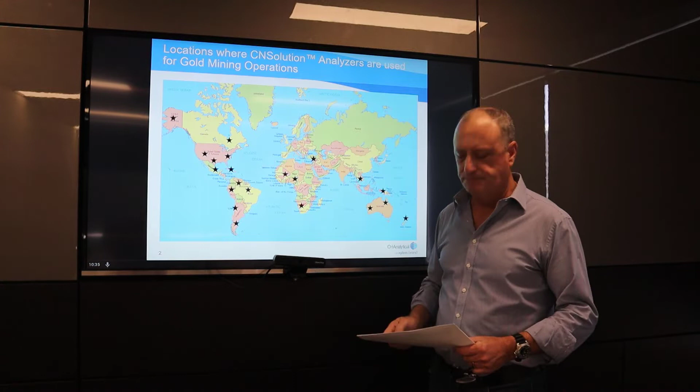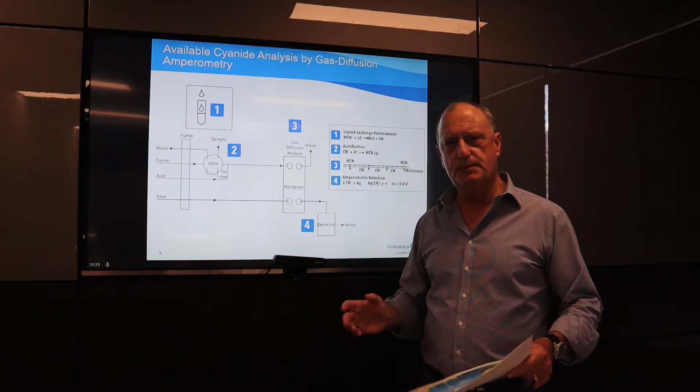Essentially, what we're doing is taking a filtered sample from either your bores or your detox plants or your discharge points, anywhere you need to monitor your cyanide at low level, which is typically for environmental applications. The technique for WAD in particular requires addition of what we call a ligand to get the cyanide into solution. We inject a known volume into an acid stream.

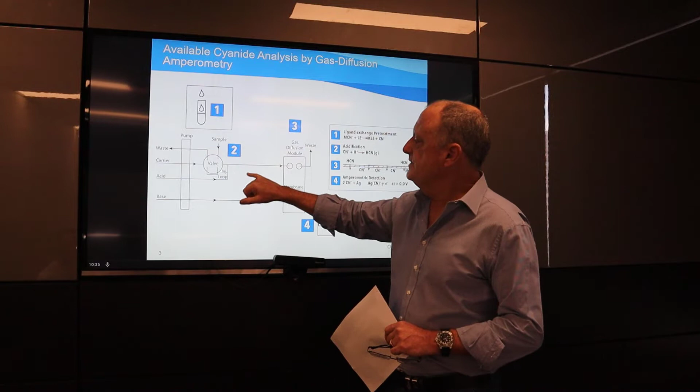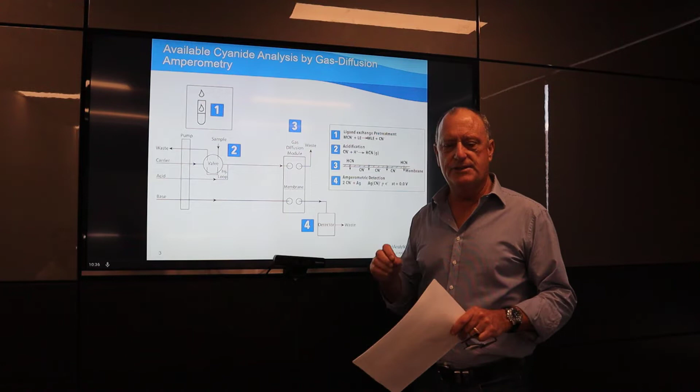Hydrogen cyanide gas is evolved and moves selectively across a membrane into a sodium hydroxide capturing solution. And it's measured by an amperometric detector, which is a silver-silver chloride reference electrode and a silver electrode. Silver and cyanide combine, releasing an electron, giving us a signal.

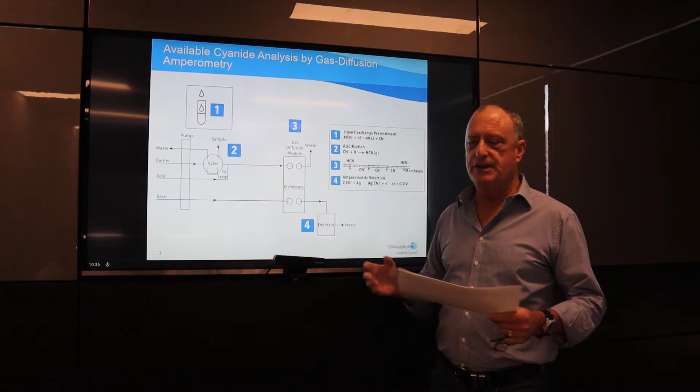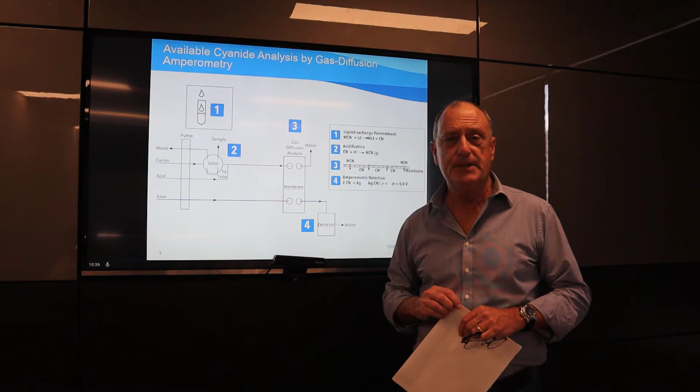So we essentially are eliminating, at the diffusion membrane, all known interferences up to about 50 ppm of things like thiocyanate. So its benefits over titration and distillation are very low levels of interferences and very low levels of detection. So we can actually use this instrument to detect up to 10 ppm and down to ppb levels. Next slide, please.

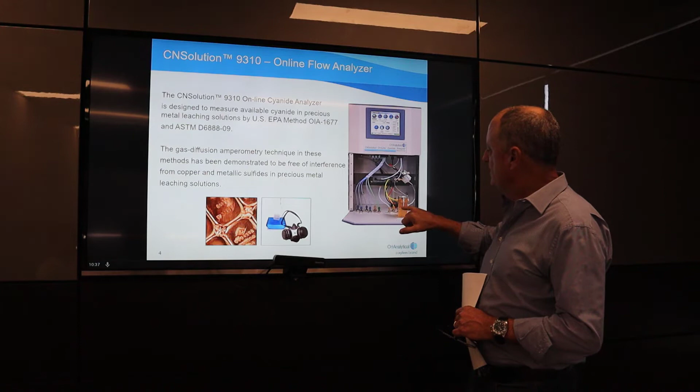There are two instruments in our offerings. One is an online analyzer, the 9310. It is using exactly the same technology. We use a sample loop to inject a known volume of sample, passes into an acid stream, across this membrane, hydrogen cyanide gas is evolved, taken into an amperometric detector cell. There's a reference electrode and measured on the instrument.

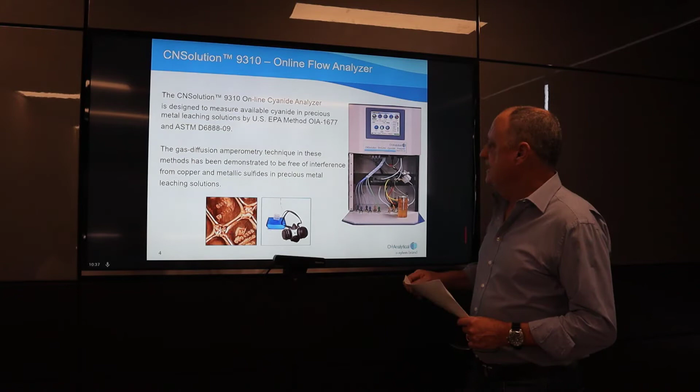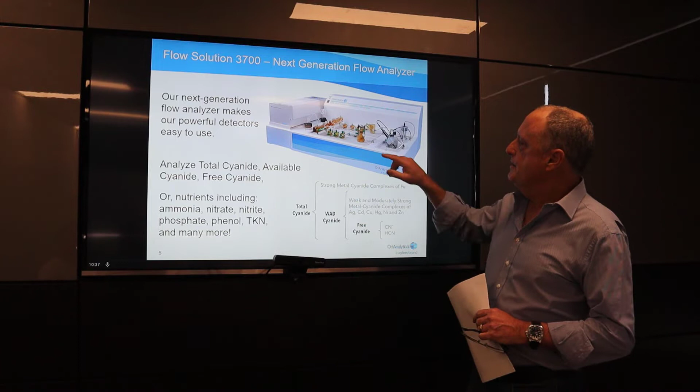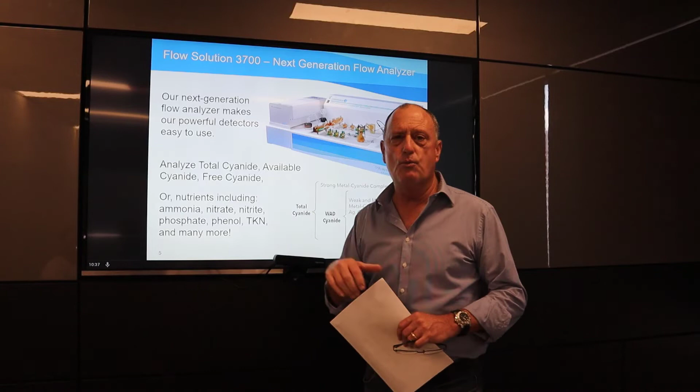We don't have many of these in Australia, but we do have the next instrument, which is the laboratory machine. This uses exactly the same detection capabilities. We have the ability to run two chemistries on one platform, and this one instrument can run all three chemistries that the laboratory might need to run, both free, total, and available cyanide, or WAD cyanide. It's also a platform for running other analytes, but we're interested in cyanide today.

So for free cyanide, we're measuring this species. We run that on the WAD channel, and the only change we make to the chemistry is the introduction of a buffer solution between 6 and 7 pH for the acidification solution, which we use for the WAD cyanides. Then we have another channel where we introduce UV digestion to enable us to break down the irons and cobalts, and we can then do a total cyanide analysis.

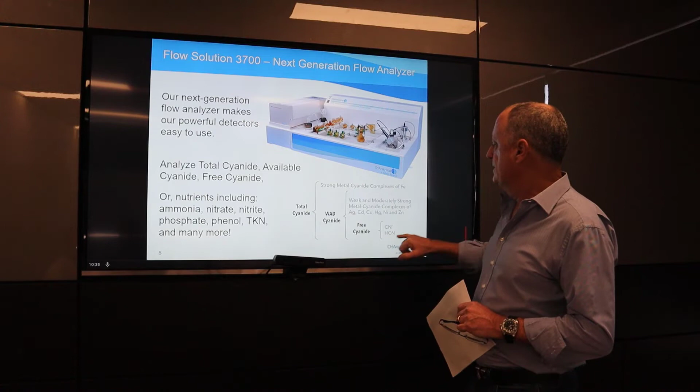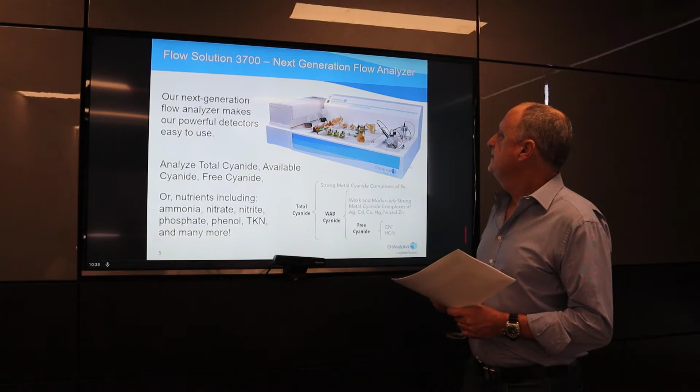Most of my customers in the gold mines are looking for WAD analysis, which is these species here. So the analyzer can be run as a single channel, as a sequential dual channel, or a simultaneous dual channel. If I could have the next slide, please. As I've mentioned before, the detection ranges for the 9310 online machine are 2 parts per billion up to 10,000 parts per billion.

We can run in the lab machine, I've calibrated out to about 80 parts per million, but the method states 5 parts per million. So we run a normal calibration for auditing purposes from 0 to 5 ppm, with higher standards than that diluted down to the detector's range.

Next one, please. The application for the online analyzers is similar to any online analyzers you might have in process control at the moment, where you want to control the level of cyanide in your plant. But our lab analyzer is what we're talking about more today.

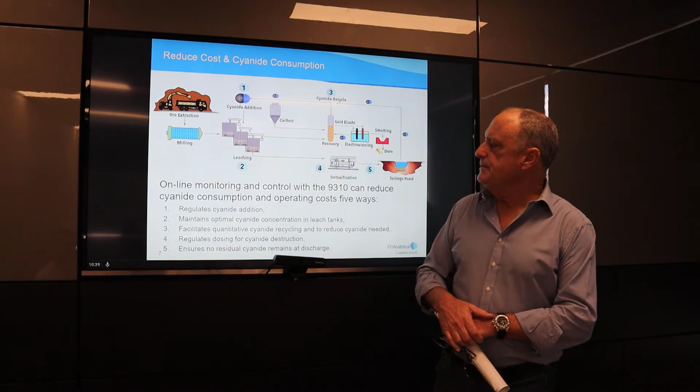Next slide, please. This is a system where samples are preserved in the field, brought into the laboratory, diluted to range, and then put into an auto sampler. A method is chosen, you push a button, walk away, and the analysis proceeds while you're doing something else. It's controlled by fairly nice new modern software where we designate an instrument, we create a sample table, we have a method, and we run samples.

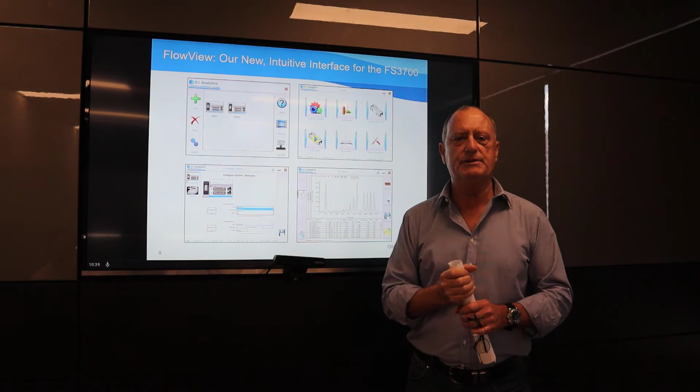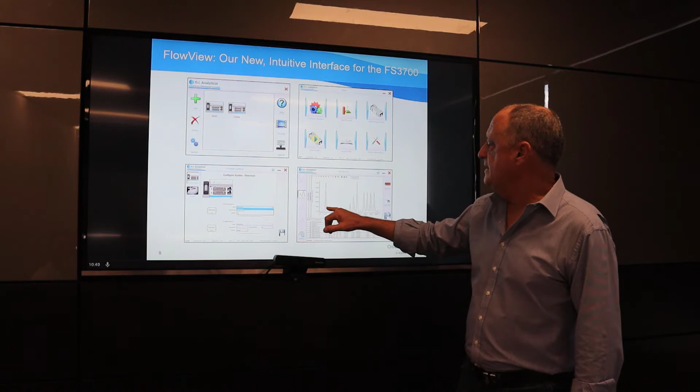Not dissimilar to, say, an atomic absorption spectrophotometer, where you're calibrating, producing a calibration curve, using known standards and a routine daily method. Results are prepared and presented like this with a sample table. Again, not dissimilar to an atomic absorption spectrophotometer. 2 channels represented here. We're looking at standard calibration, a series of unknowns, and then a report.

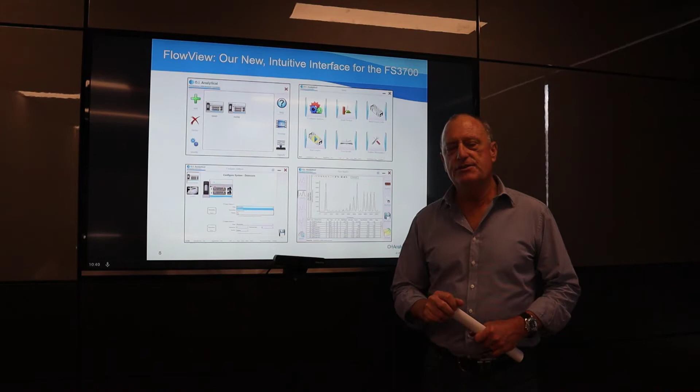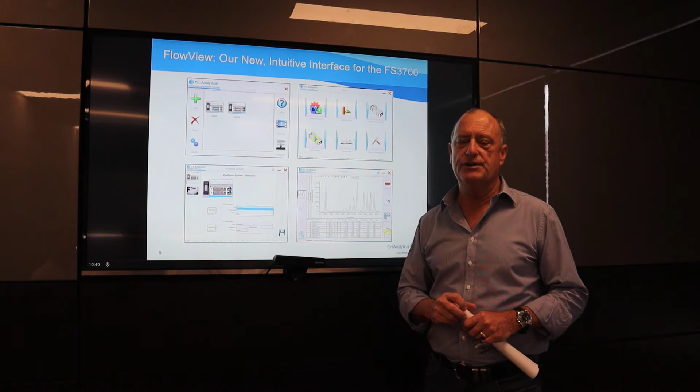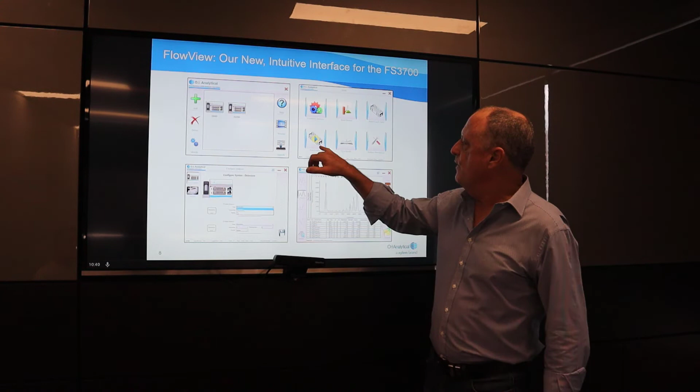As far as reports go, we can export that a number of ways. We have the ability to print it directly to a printer. We have an export function here to either go out to LIMS or out to an Excel spreadsheet file on your computer. If you're running LIMS, which is, I guess, the feature of this seminar today, the ability to import is in here, the build sample table. We import a sample table, save that name, and when we run samples, we call up that sample table exactly as you've presented it from your LIMS system.

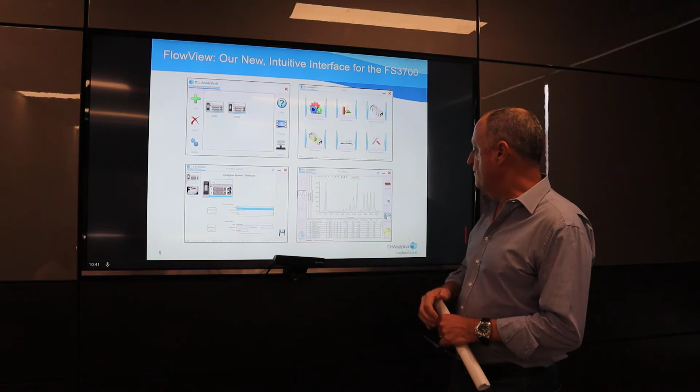Equally, when you finish the run, you export those results. You can save them in any format you like. So it is very LIMS friendly, and we have a number of instruments in Australia running LIMS on this machine. Next slide, please. Thank you very much. That's the FS 3700. Any questions?

Great, thanks for that presentation, Graham. We hear a lot about our customers using cyanide titrations in their laboratory. So can you tell me the advantages of flow injection analysis you've presented today over cyanide titration? Sure. Increasingly, gold mines are becoming subject to audits, particularly environmental audits. There's one side to the gold mine, which is the process side. That's where you make your money, so it's important to control your cyanide so that there's enough in the tanks to make sure you're not missing gold.

But on the other side of the coin, if you're using cyanide, you are required by law not to discharge that into the environment. So what you're probably doing now, if you're not using flow injection, is titration, or perhaps even still distillation. The problem with those techniques, while they're cheap, is that they are highly erroneous, and with titration, subject to interpretation by operators. So if you need to improve the precision and detectability for your cyanide, if you're under pressure environmentally, or you're spending a lot of money sending samples out to private laboratories in major cities, you may want to look at a lab-based on-site solution.